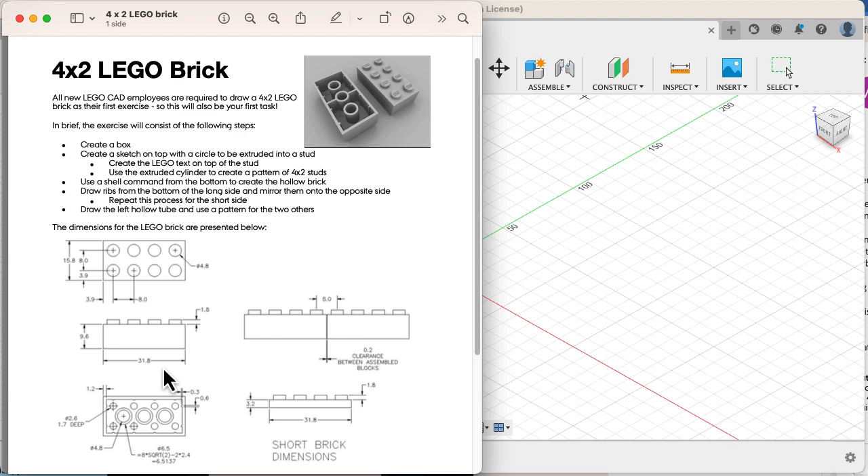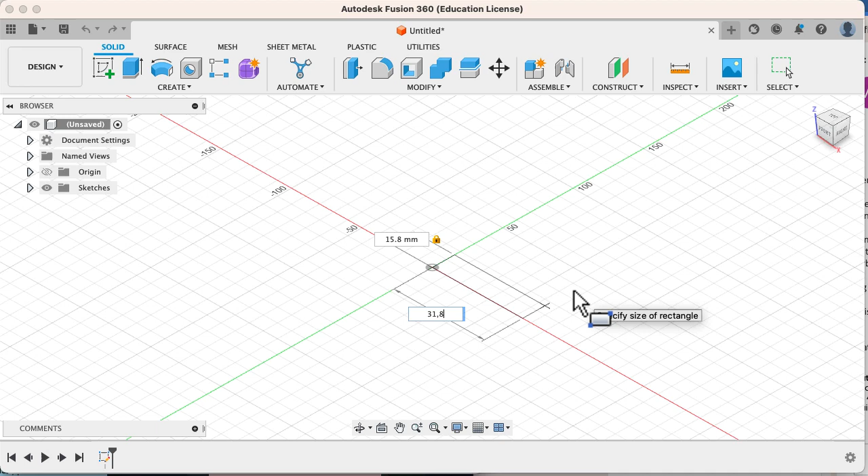First off, this one will be 15.8 by 31.8 millimeters and 9.6 millimeters in height. So we will go into Fusion, open a new document, and create a box. Again, we'll need to select the plane, and I'll use the XY plane. Just hit a corner, and then we have the dimensions: 15.8 by 31.8. Next we'll need the height, and the height again was 9.6. So now we've got the box, the rough outline of the Lego brick.

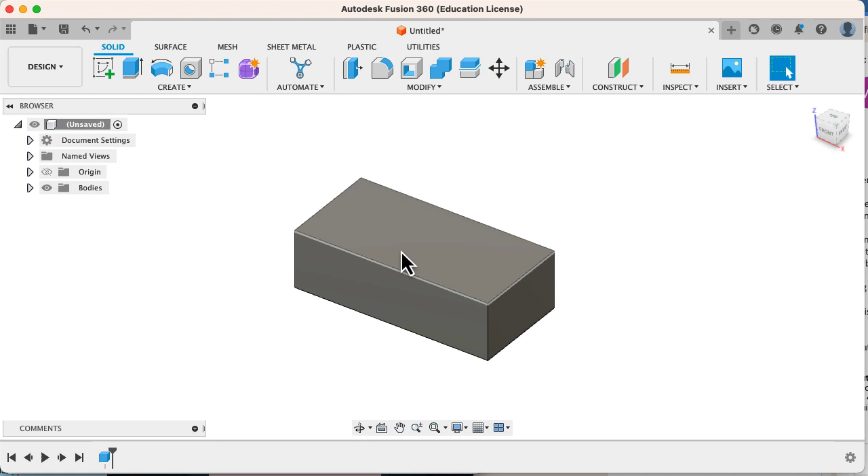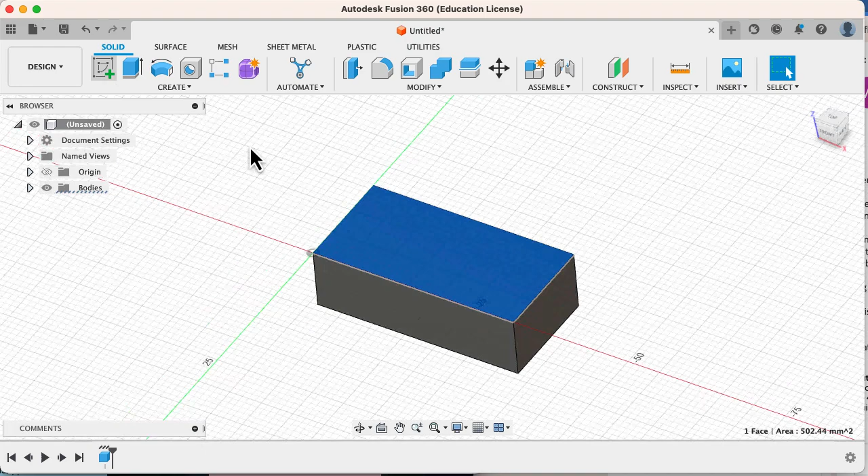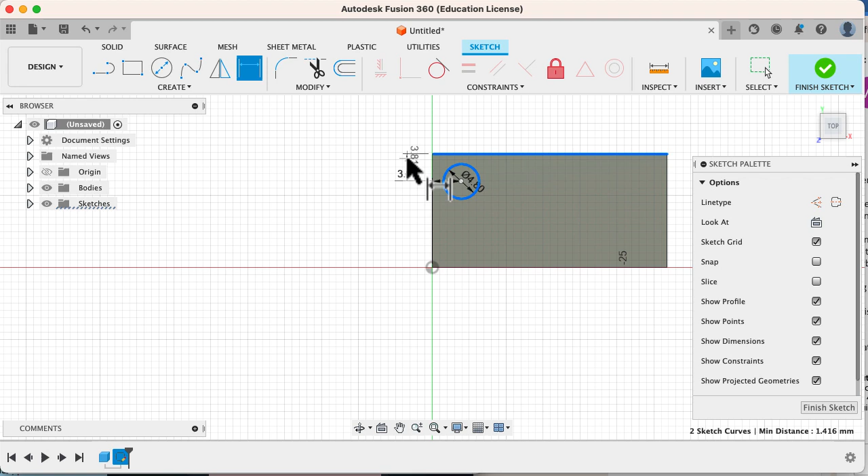Next off, we'll need to draw the stud on top. Here we have all the different studs, and one of them has a diameter of 4.8, and you'll notice that it's located 3.9 and 3.9 from that side and that side. So create a sketch on top of the brick, create a circle, and this one should be 4.8. Next, hit the dimension tool and say from here to the circle, it'll default to the center of the circle. This one should be 3.9. Likewise from the other side to the circle, this should also be 3.9. In this case, I will not enter the 3.9 because I can just hit the other dimension, and it'll be a calculated dimension stating that I'll need 3.9 both in that and that direction.

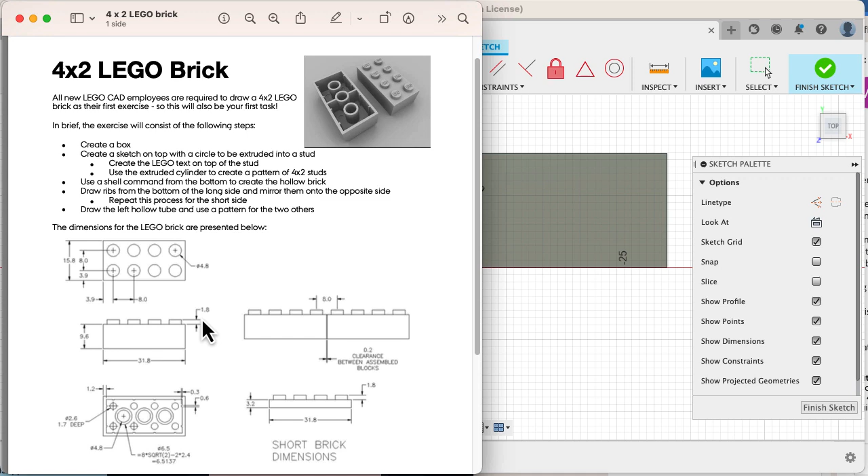So now I've got the stud drawn, and next we'll need to extrude it by 1.8 millimeters. So hit E for extrude, click the circular outline, and 1.8 millimeters in height. So now I've got one stud.

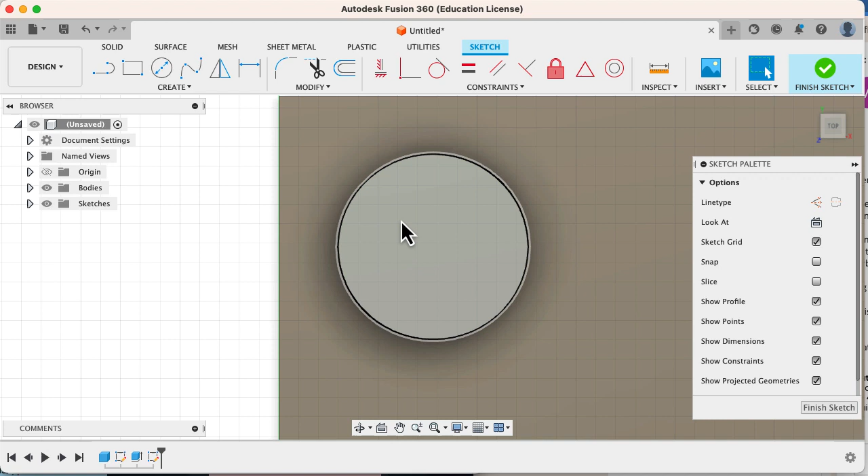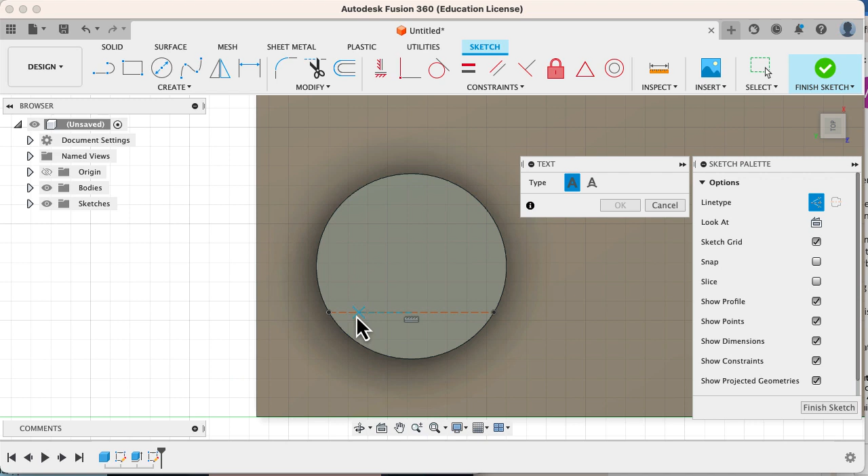Then we need the text, so hit sketch again, click on the top cylinder, and when we draw text, we will need the text tool. This one should be aligned to a line, so I will just rotate it so we get the right direction. Hit the line tool, and this should be a construction line. I'll go from one side of the circle to the other. I don't know which height yet, I'll select that in a moment. Then I'll choose the Create Text tool, hit the side of the line, and draw the corresponding box in which I can write text.

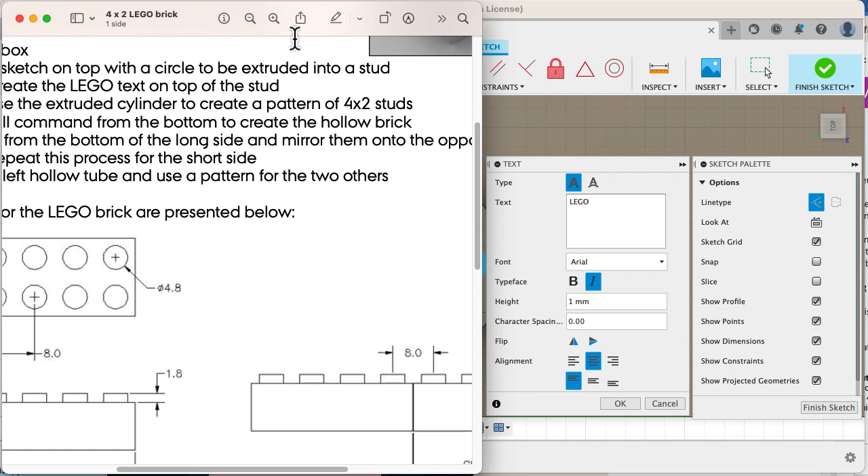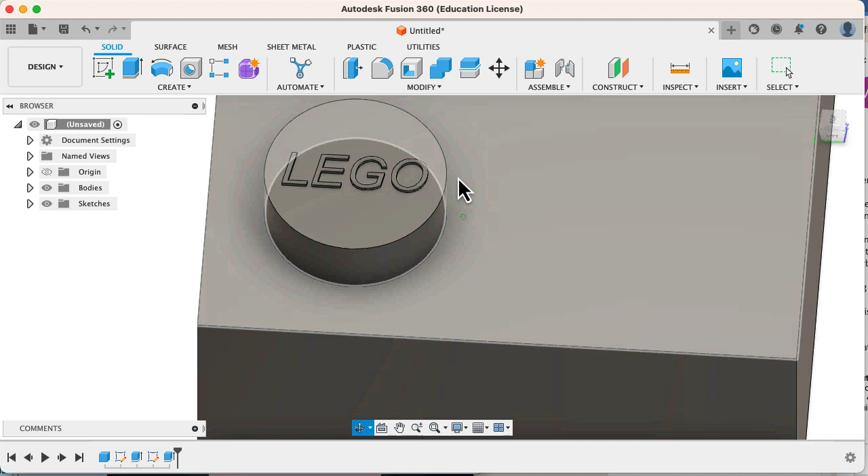So the text here should be Lego. As you might notice, this is very large, so hit the dimension tool and get it to be about 1 millimeter. I'll center it, not there, we'll put it to the left. It seems to be pretty centered, I think that's perfectly fine. We'll do the italic stuff, because if you really zoom into this one, you'll notice that's also what a Lego brick has. So I'm pretty satisfied, this looks about right. Hit OK, finish the sketch, and next hit extrude and select the Lego text, ensuring that it's blue, and I'll extrude this one for about 0.1 millimeters. So if I rotate, you notice that I've got the Lego text on a single stud.

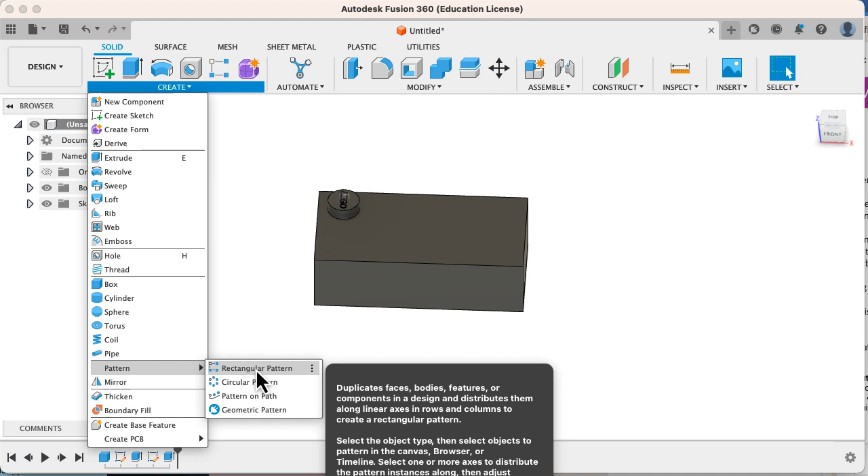So what about all the rest? Well, here we can use the pattern tool. There's either a rectangular pattern, a circular pattern, or pattern on a path, geometric patterns, whatever we like. But in this case, the rectangular pattern is actually what we like. So what should we be patterning? It defaults to bodies, but this is just a single body, so that would be the entire Lego brick. So in this case, we're actually going for the features. Which features? Well, we need the stud and we need the text.

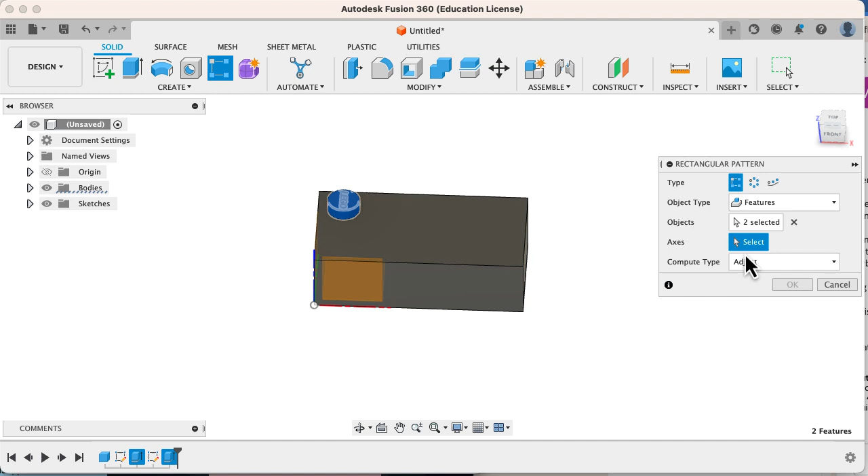So 2 features. Next, we'll need to hit the axis and just point to one of the sides and say that's one direction. How many? I need 4. And then you can actually just draw them out, and also the other direction, draw something out. It defaults to 3, that's not correct, it should be 2.

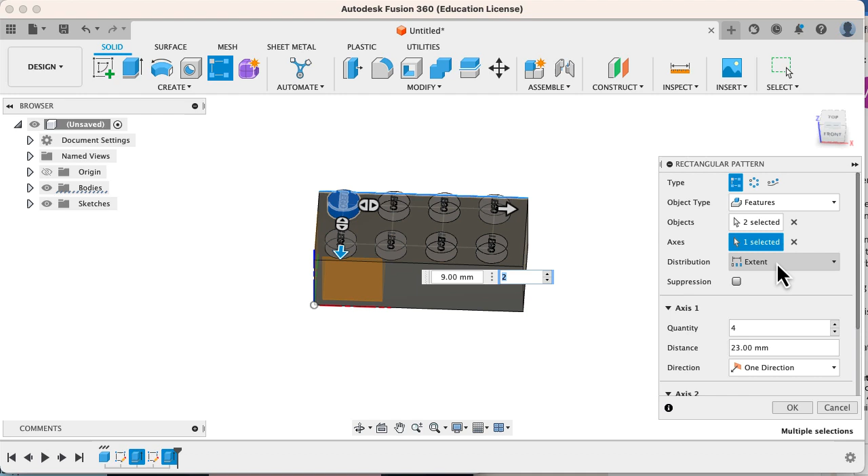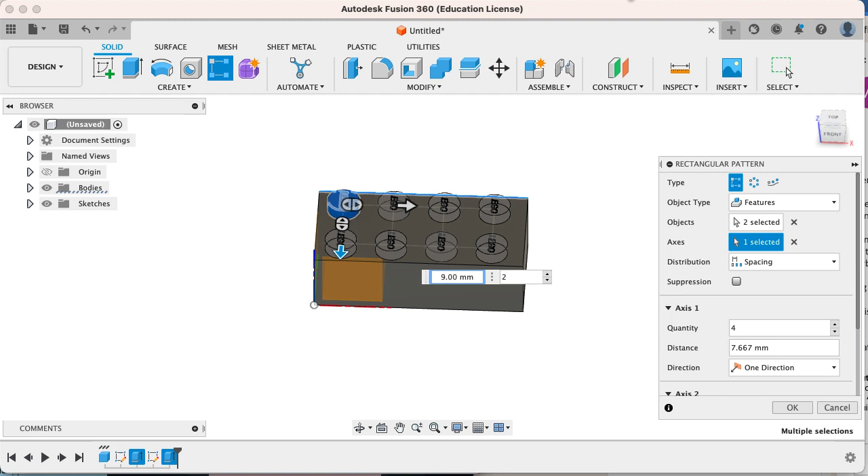It defaults to an extent in both dimensions, but that's actually not what I'd like. I want a spacing, because that's what's specified in my drawing. Notice here we've got 8 millimeters in both directions, so that's what we need to specify when we choose the spacing: 8 millimeters one way, 8 millimeters the other. So 4 spaced 8 millimeters apart, 2 spaced 8 millimeters apart, and hit OK.

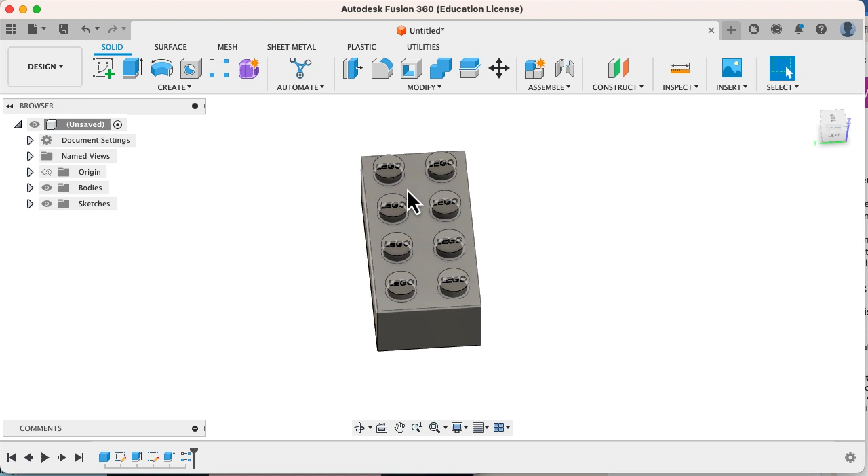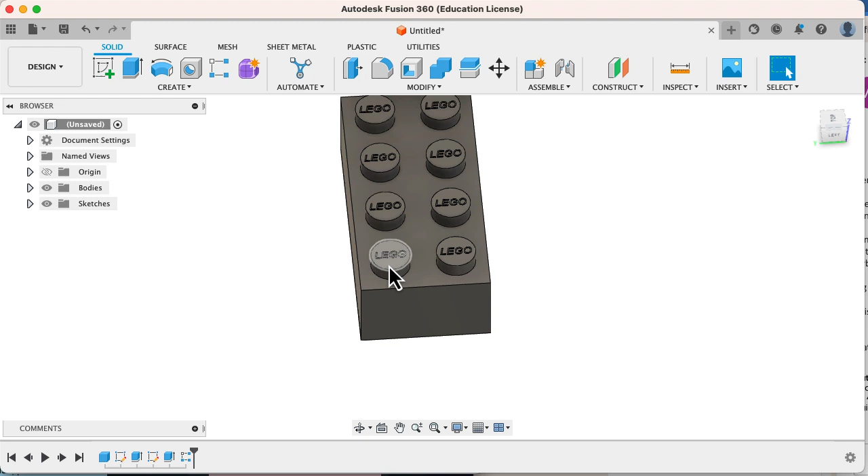And now we've got all of the studs present. The reason this is a good idea is that if you change something, let's say the extrusion or the font was incorrect, and you change the original single stud, all the other studs will also change in the same manner. So instead of drawing 8 separate studs, this is a vastly improved version of the same job.

But this is a whole brick. This won't work if we want to build anything — we need to hollow it out. So next we'll hit the shell button, and you just need to select the surface to remove, in this case the bottom. And we'll need to check the dimensions.

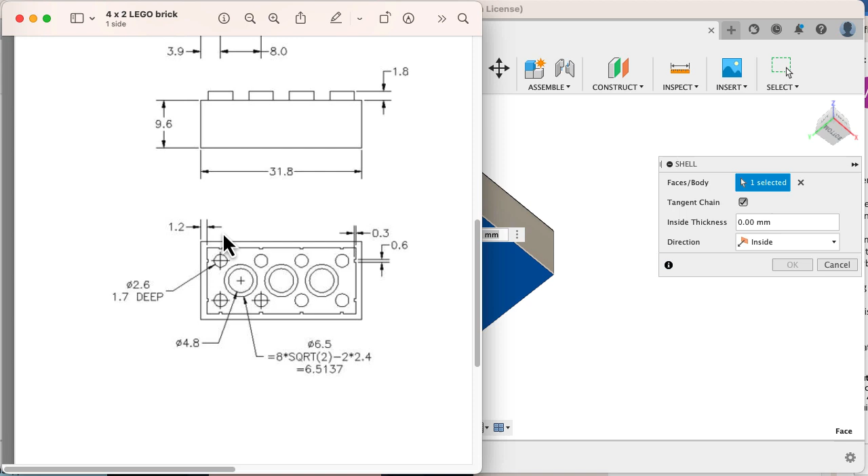So it's 1.2 millimeters in thickness. So 1.2 — and you can notice it eats everything, including up into the different studs. That's perfect, that's exactly what I wanted. So now we have the shell.

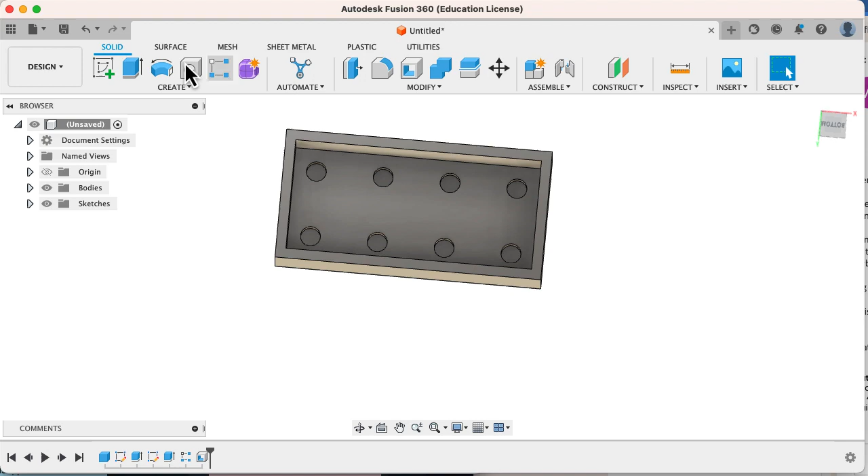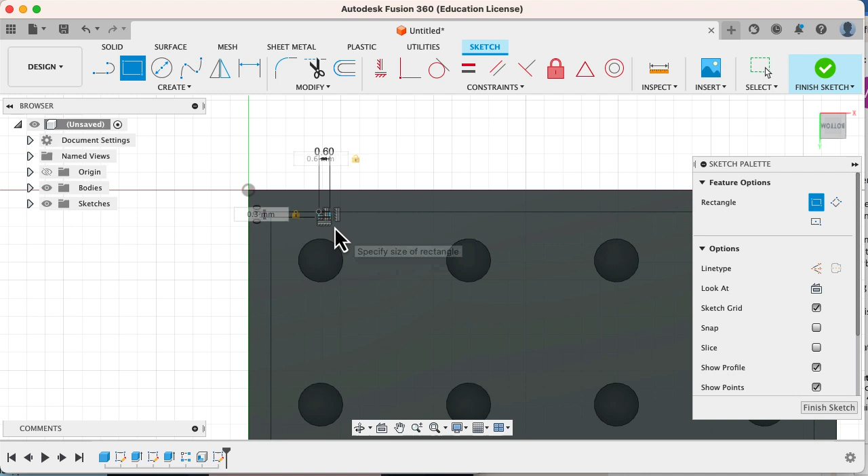Next up, we need the slits on either side. If you go into this one and look at the dimensions, you'll notice these are 0.6 wide and 0.3 high. In this case, I'll sketch from the bottom of my brick. I'll hit this surface, hit the rectangle, and just draw a rectangle here. The dimensions were 0.6 by 0.3 — so 0.3, 0.6. That's the little bitty thing I wanted.

Next up, we need to place it correctly. As you might notice, it has to be placed right next to the stud, because its function is actually to connect to the studs on top. So we'll need to align it.

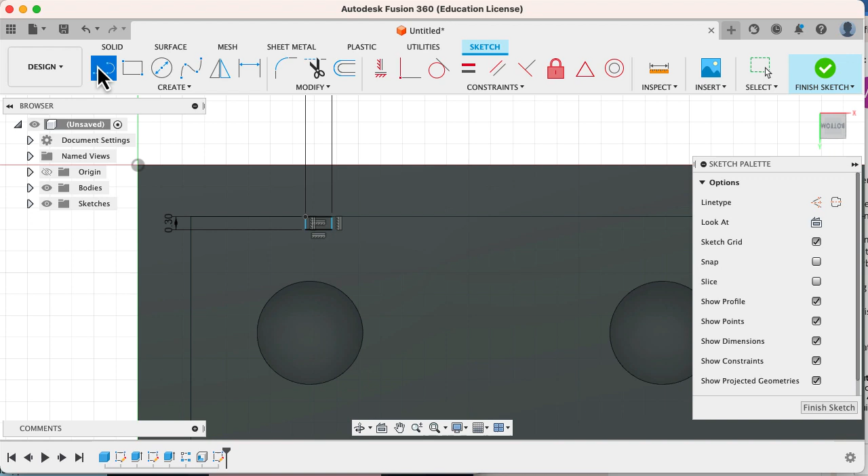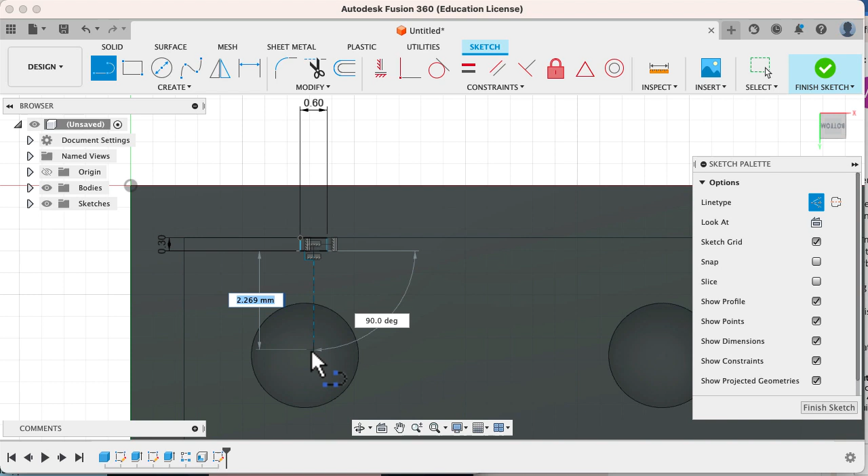The easiest way to do this is to use a helping line. Hit the line tool, hit construction, and draw a line from the center of the small rectangle to the center of the circle. As you might notice, I can't catch that — that's because I haven't got access to this line, it's not in the same plane. I'll hit escape, and if you rotate around, you can see what I'm talking about: we're drawing up here, but this one's not right there.

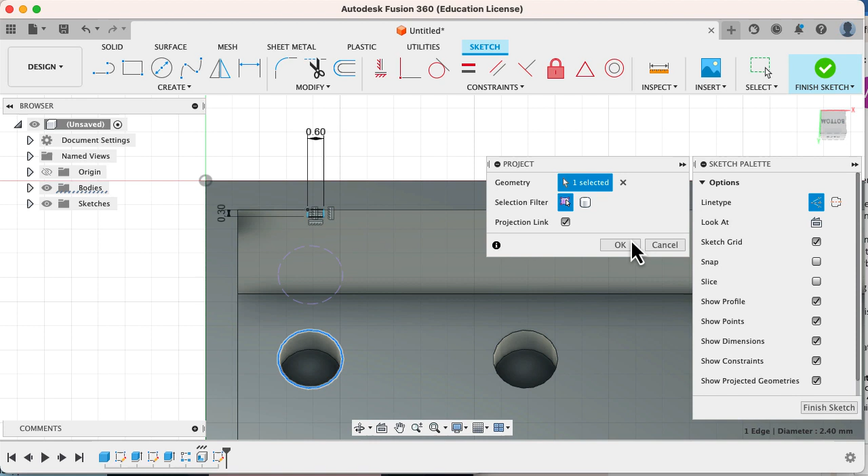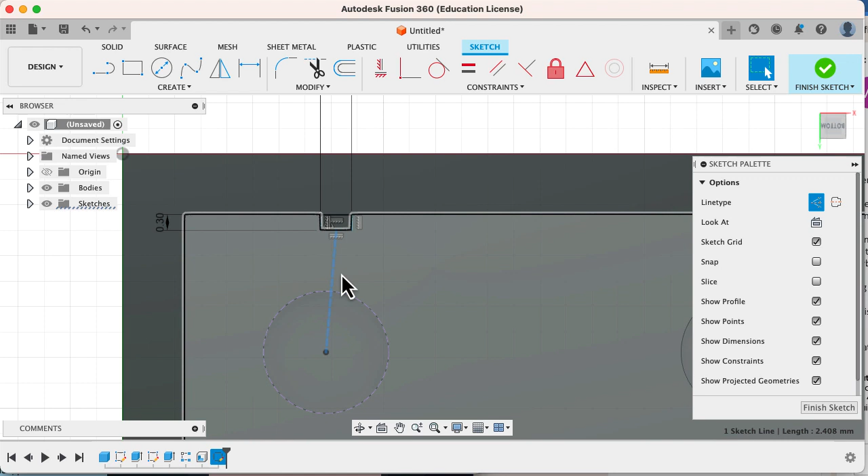So in order to gain access to that one, we need to project it into the sketch plane. Hit P for project, hit the geometry I want, and you'll notice the construction geometry gets projected into my work plane. Now I can actually do what I wanted — draw a line from the center of my small rectangle to the center of this circle. It's still not correctly placed, because this one isn't vertical. But if I hit the line, hit vertical, it'll move into place. Now I know this one's placed right outside the stud I needed it to be in.

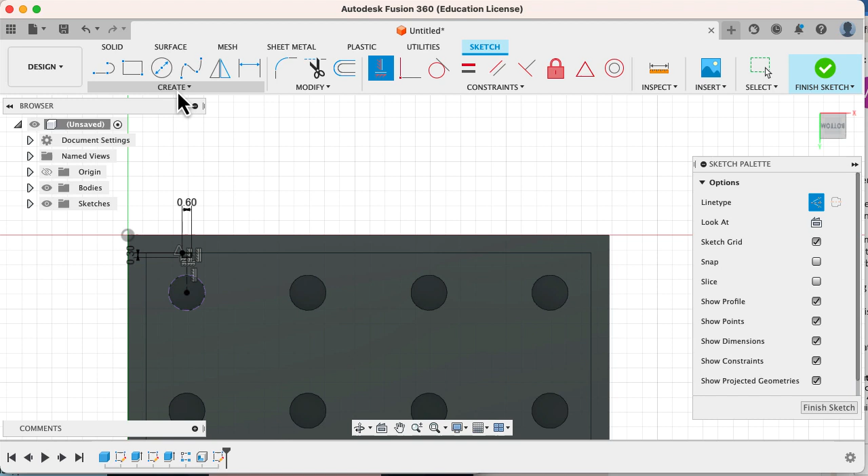So we are done — now we just need the pattern. I can either do the pattern inside here, but I prefer not to. There is a rectangular pattern option in here, but the reason I don't like doing it this way is there are a lot of symbols and they get even worse when you do it in here. So I'll actually extrude this one in the 3D and then do a pattern on the extruded feature. Okay, so again, hit E, hit this small section.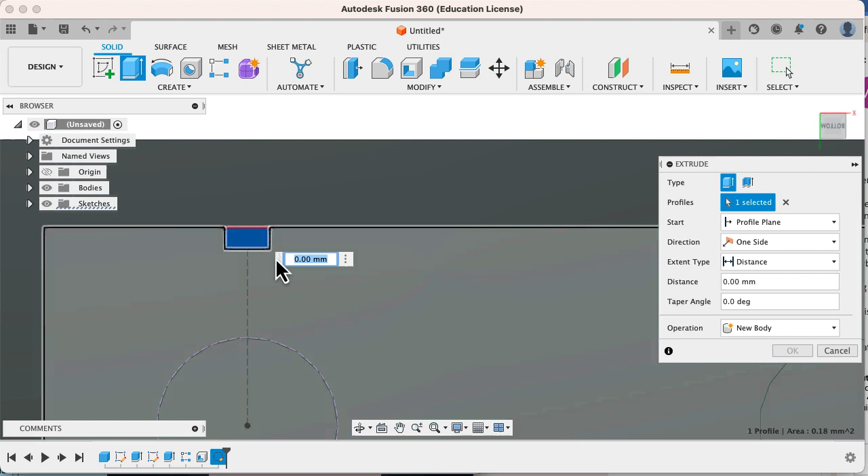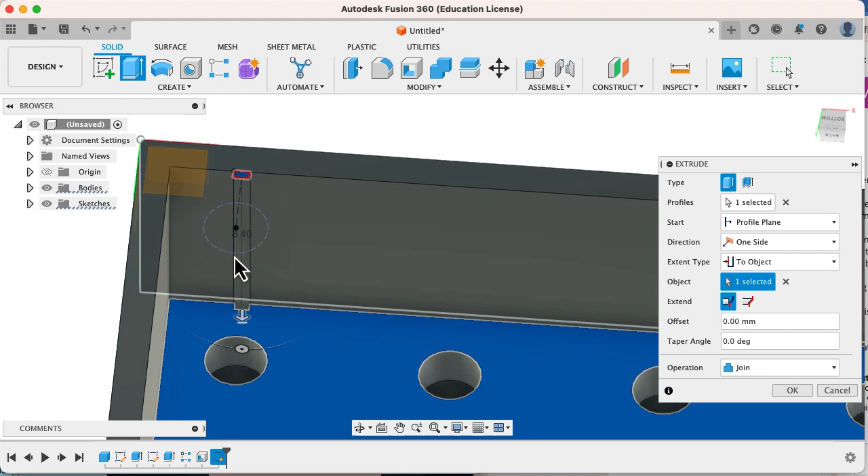Until now, we've always extruded to a known distance. In this case, I'd like to extrude to this surface, because that's the height I want it to go to. I don't know how high it is — I could find out, but it's not necessary, because I just tell it to go to that surface, and it will extrude to that specific surface. So now we've got one of them.

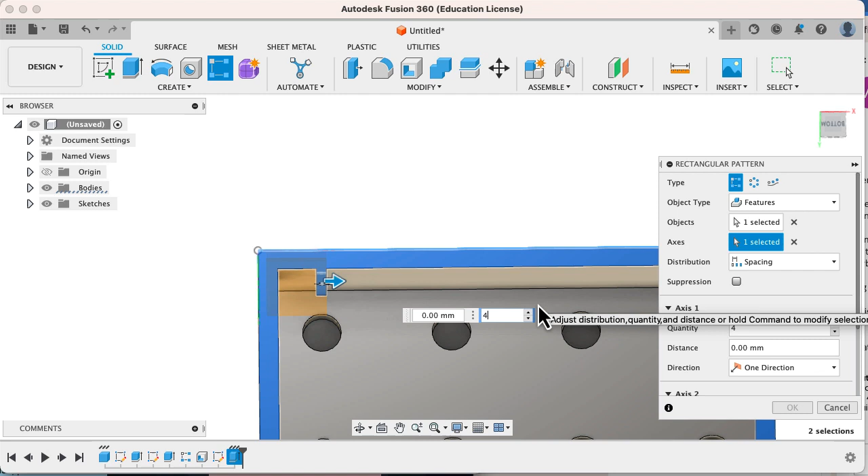Next up, again we'll hit the pattern tool, the rectangular pattern. It's set to features, so I'll just hit this feature. Next we'll select the axes, and again this will be that way. We'll need 4, spaced 8 millimeters apart. So, we've got all of them. Okay.

But what about the other side? I could have done a rectangular pattern like before, spaced so and so in the other direction, but I'd like to introduce a command called mirror.

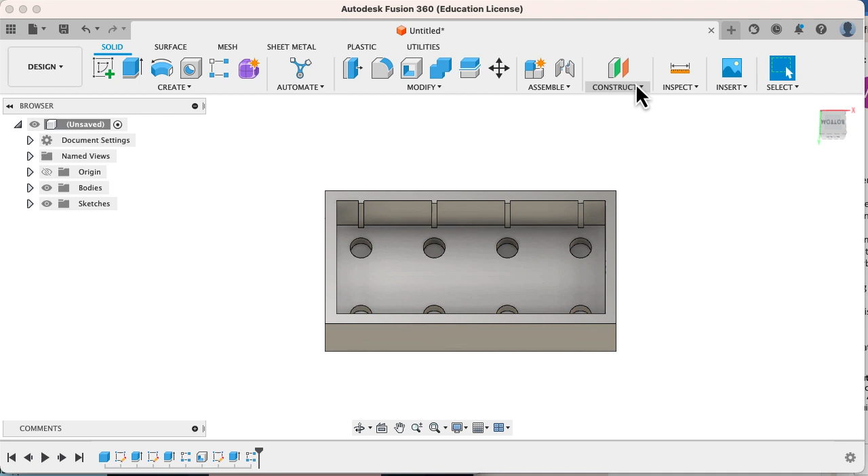First off, we need a central plane. It probably would have been better if I drew this Lego brick with the origo in the center, but you might remember the origo is placed in the corner, so we can't do that. Fortunately, we can create helping geometry, namely a midplane. If you expand the construct button, you can see different ways of drawing a plane, including the midplane. So you hit one side and the other side, and now I have a plane specified in the center.

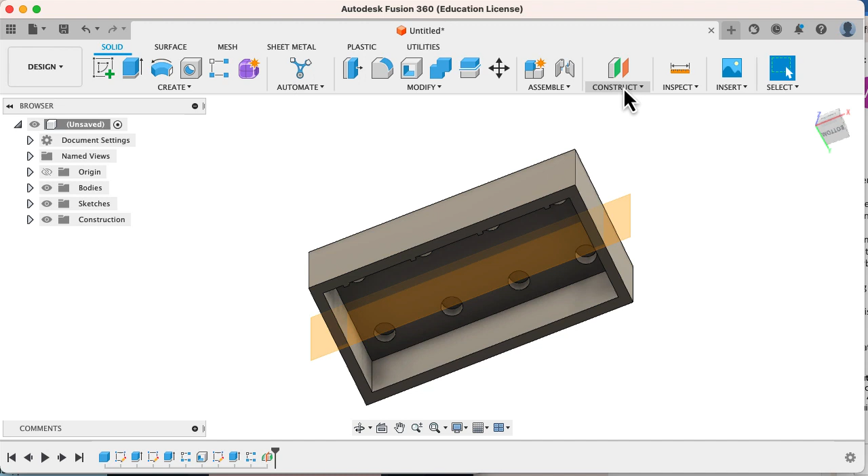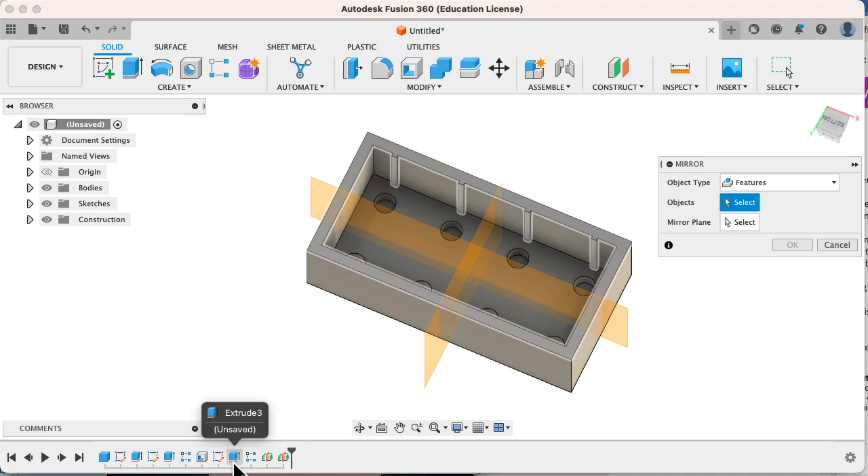I can help myself here, since we also need to draw rectangles on the side. Once more, create a midplane between this side and this side, and now I've got the two planes I need. So now we can mirror these four things to the other side. Create mirror. It defaults to bodies, but we need features, and I'd like the initial extrusion and the pattern. I want a mirror plane, which is this one, and now I've got the rectangles on both sides.

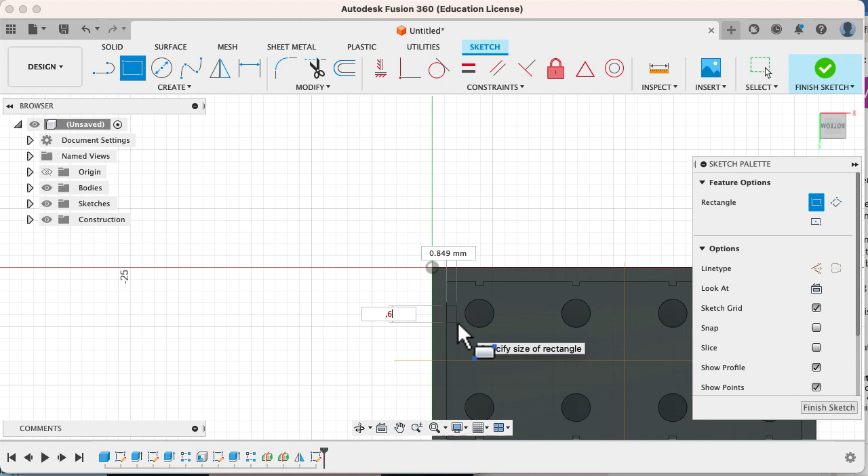So rinse and repeat. Now we need the short sides. I'll hit this surface, sketch, and do a rectangle which should be 0.6 by 0.3.

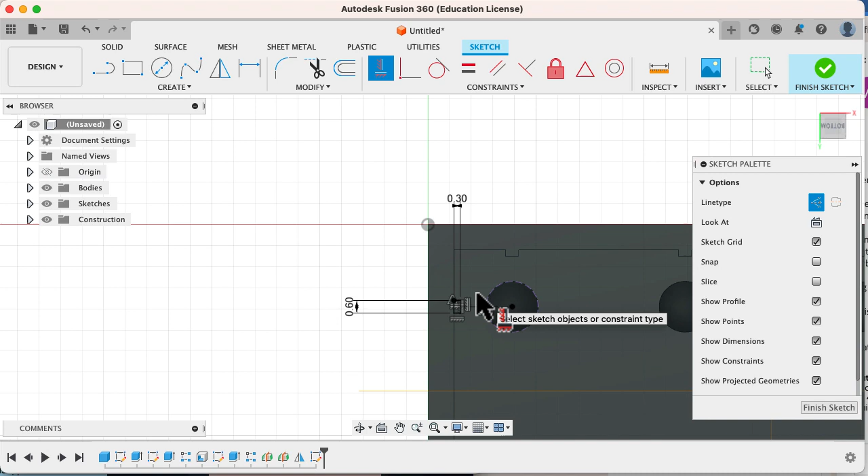And again we'll need to project the circle using construction geometry. Hit a line from the center of the rectangle to the center of the circle, and ensure this one is horizontal. So now it's placed correctly. I'll hit finish.

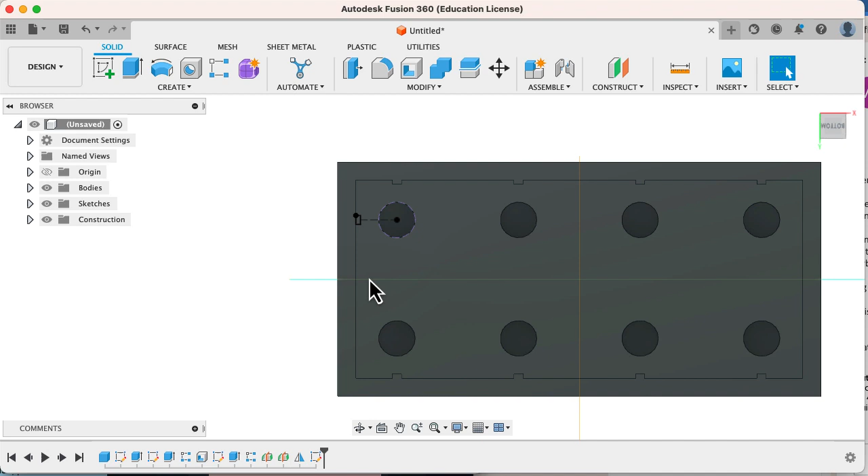Two options now. I could do a pattern, then I'd need to specify the distance, but you might notice this one is actually perfectly symmetrical, so I could just use a mirror. I'll use that one. Create mirror - oh sorry, I forgot to extrude. Just extrude the rectangle, again not using a distance but to the bottom, and hit OK.

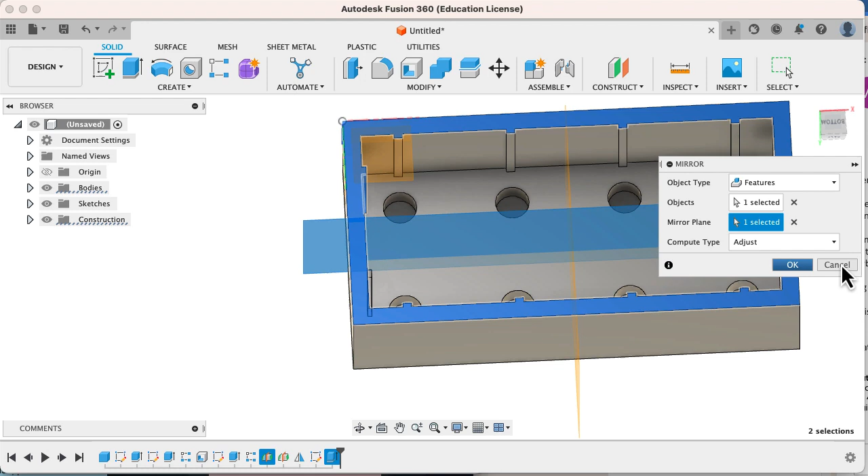Then do the create mirror using the just extruded feature and the same mirror plane. So now it comes over here. And now we just need it on the opposite side, but that's why we did the second plane.

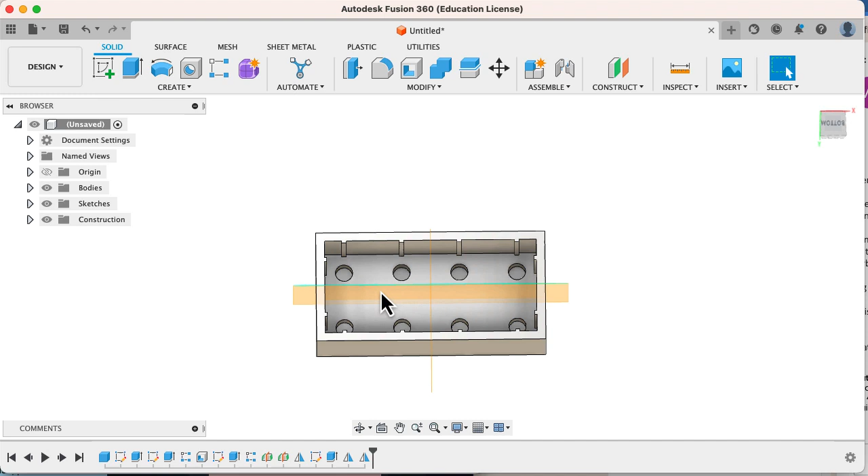Again, create mirror, hit the initial extrusion and the mirror plane, and the two rectangles appear on the opposite side. So we are almost finished. Next up, we'll need the circles in the bottom. I'll just hide the construction geometry by hitting the I key.

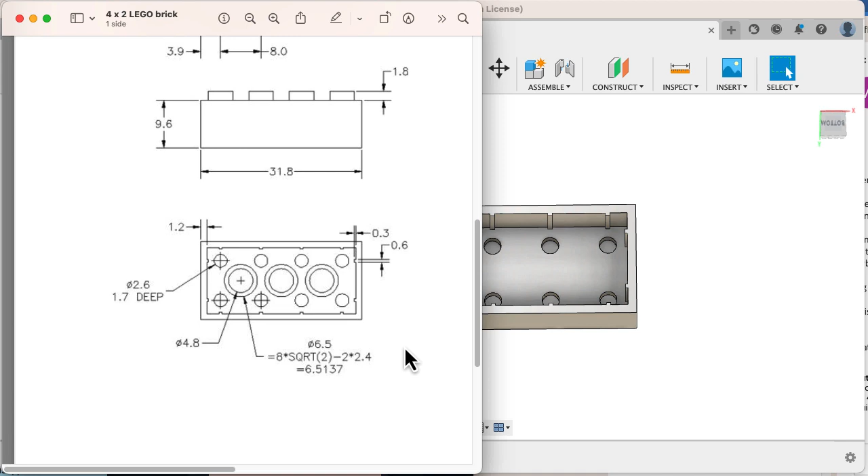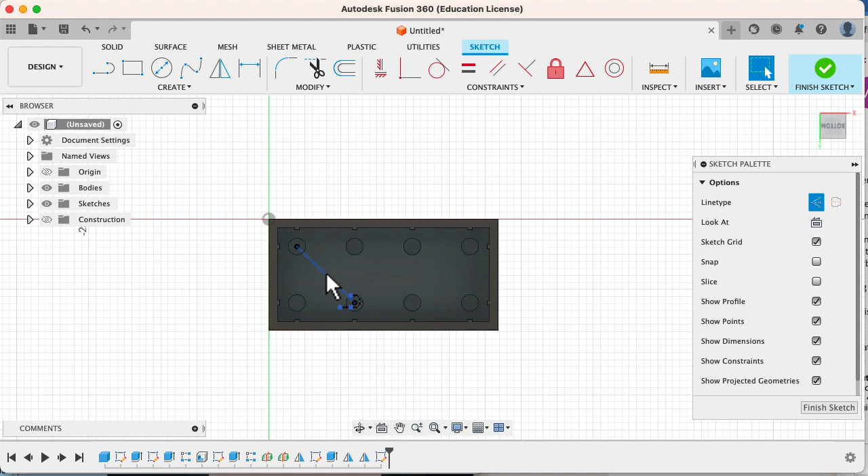So let's draw this. We'll hit the bottom here and sketch it. We need a circle right in the center. How to do that? We could hit the line tool, create construction geometry going from this circle to this circle, because then we'll actually have a center to draw a circle on. Hit the circle button, and this should be regular geometry, so I'll switch off the construction. Again, if I hit the center of the line, a small triangle will appear saying you are drawing at the very center of this line.

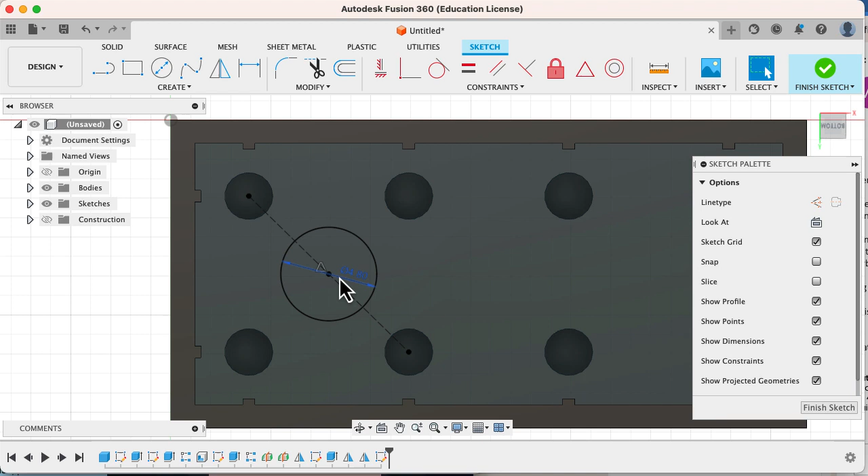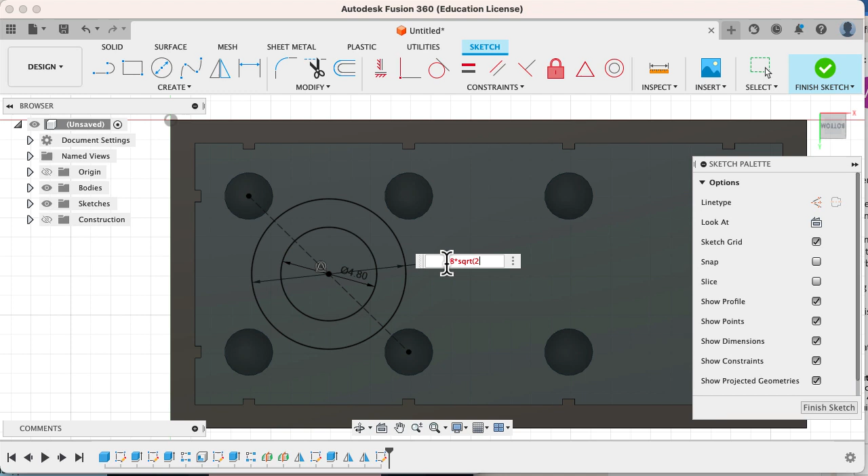First off, I needed a circle of 4.8. Next, I needed another circle, so hitting C, that should be another distance. This one is 8 times the square root of 2, minus 2 times 2.4. So dimension, hit this one, and say 8 times the square root of 2 minus 2 times 2.4. Hit enter, and it calculates the equation saying 6.514.

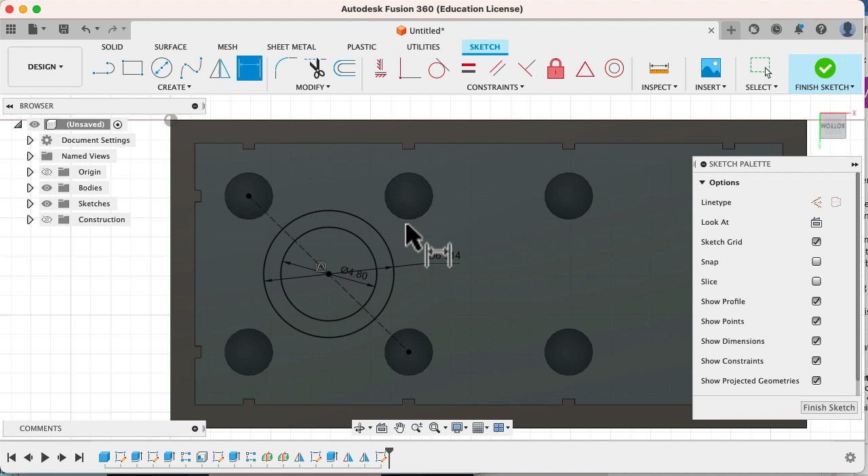Good to go. Hit finish, and again I'll need to extrude what's between the two circles. That's easy, I'll just click it. Once more I will not be entering the distance - I want to extrude this one to the top. Hit OK. So now I've got one circle, and again I can do a pattern.

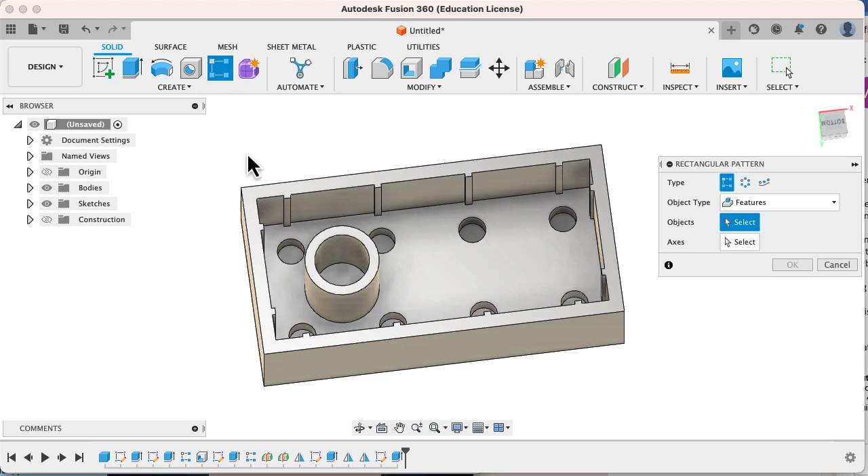So hit the rectangular pattern, it's set to feature, click the feature, click the way to draw it, go in this direction, and we'll need 3 - that's actually correct - and once more 8 millimeters apart. That should be good.

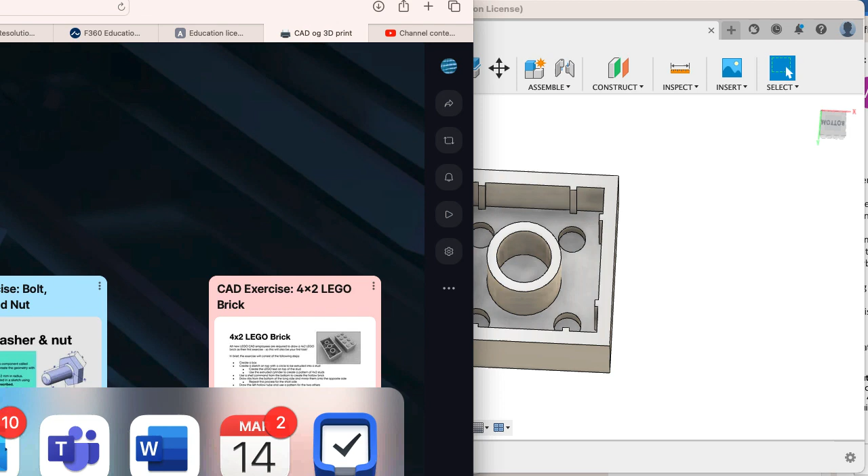So finally, and the instructions diverge a little bit on this point, I think this is actually a perfectly fine Lego brick, but if you notice the instructions, we have this little middle part here. Let's just assume this one needs to be drawn. I don't actually know the dimensions because they're not present, but let's assume this is something we need to create.

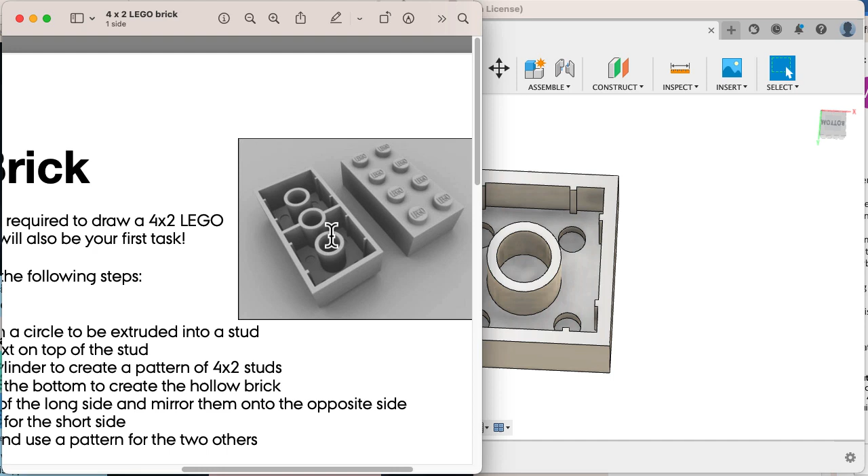And I think it's about the same dimension as the small ribs, so we'll do one 0.6 millimeters wide directly in the center. So, sketch on top of my brick, and now I would like a rectangle in the very center.

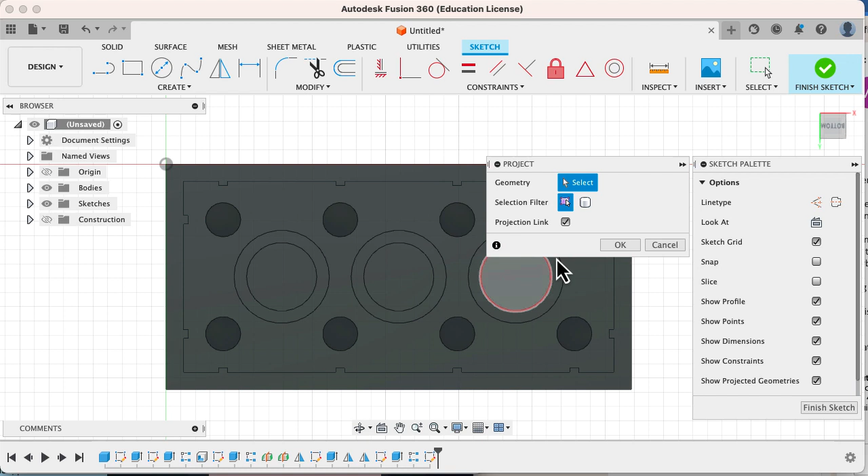I'll hit P for project, construction geometry, and get the center circle, so now I know where the exact center of my model is placed. I go back to regular geometry, then I'll create a rectangle, but in the rectangle part I can choose a center rectangle. If I hit this one, I can go out and hit the side.

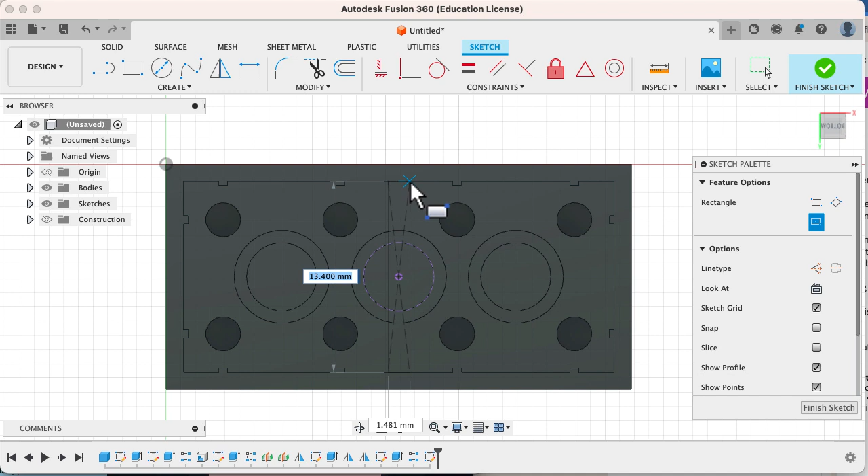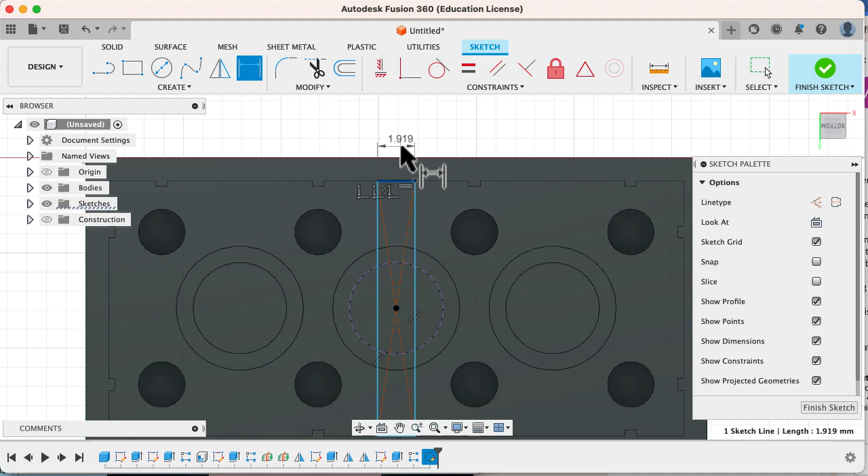So here a number of constraints are imposed. You can see the orthogonality, we can see this is horizontal, and it's set to be on this line. I can't move it away, so that's perfectly fine. Now I just need a D for dimension and say this little distance should be 0.6. I'm guessing, but let's say that's correct.

So I'm actually done, I'll hit finish sketch because... oh, I made a mistake. I'm sorry, I forgot to project the outer circle. We need to do that.

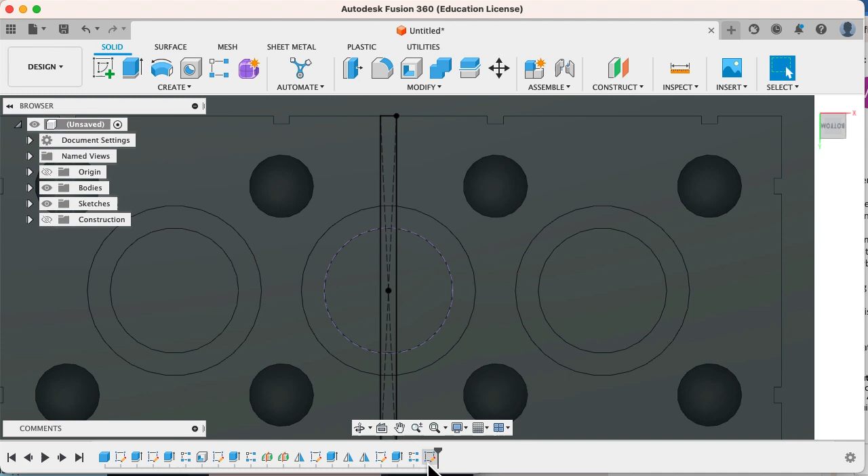Edit the sketch, hit P for project, and hit the outer circle. And this one should not be construction, that's actually what we require, because the only thing I want to extrude is this part and this part. So whenever lines intersect in Fusion, they actually divide the geometry.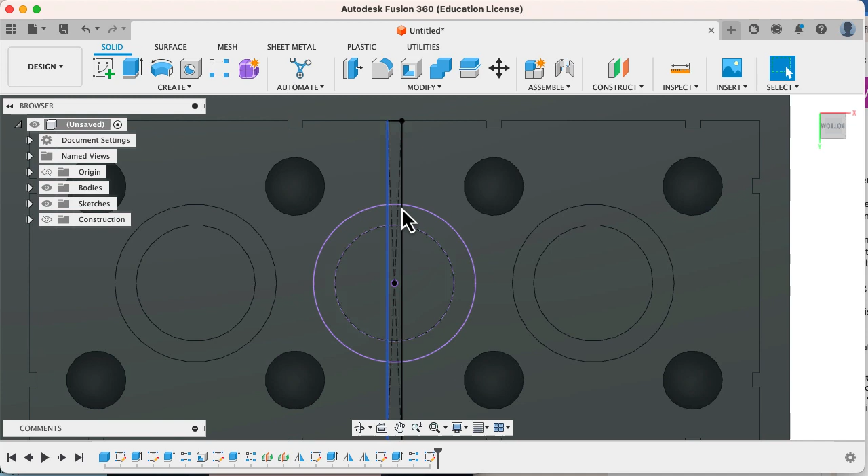So my final extrusion will just be an E, and this part, and do it to the bottom of my Lego brick, and now I actually have that central rib that's depicted in the image.

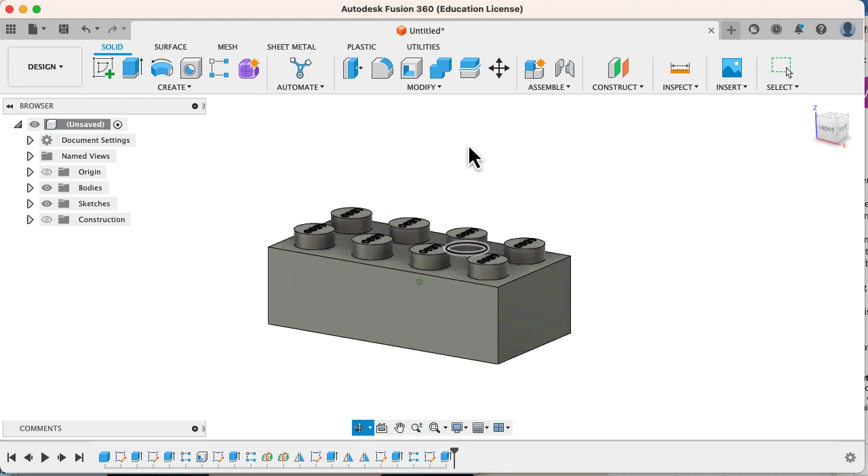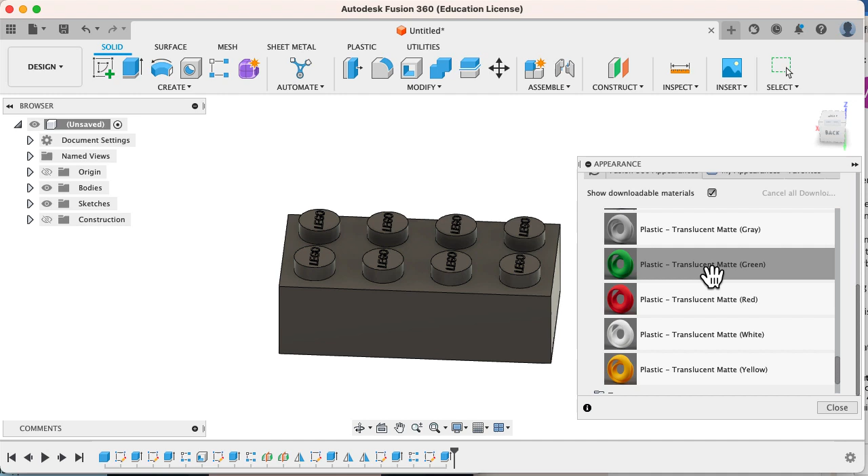One of the fun parts of Fusion is you can change the appearance. You can do it red, white, gray, whatever you like, if you just hit A. In A, you have a library of different materials you can impose upon this one. One of them is named plastic. If you go into that one, there are some translucent plastics, including a very nice red. I'll just drag it over my Lego brick and it turns red.

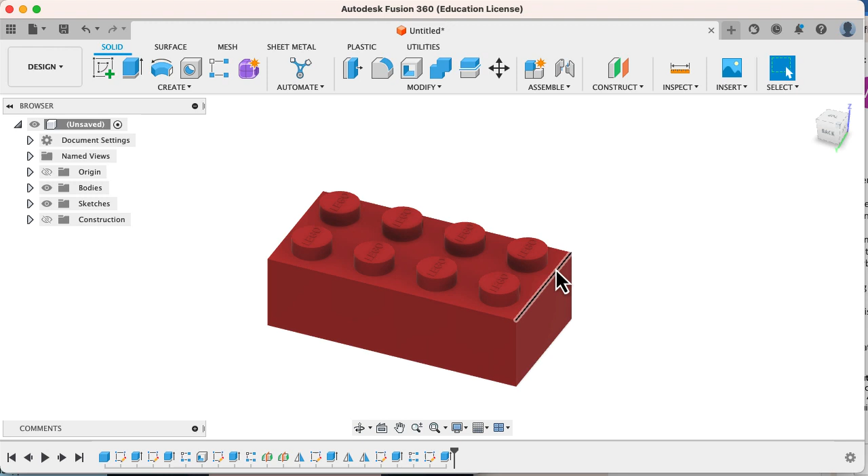You might not be that impressed. I mean, okay, it looks nice, but it maybe could look nicer. One option is going to the display section and say visual style. It defaults to shaded with visible edges, that's why there are these black outlines. If I just say shaded, then I get a more realistic view, now these black outlines are hidden. I'll just set it back.

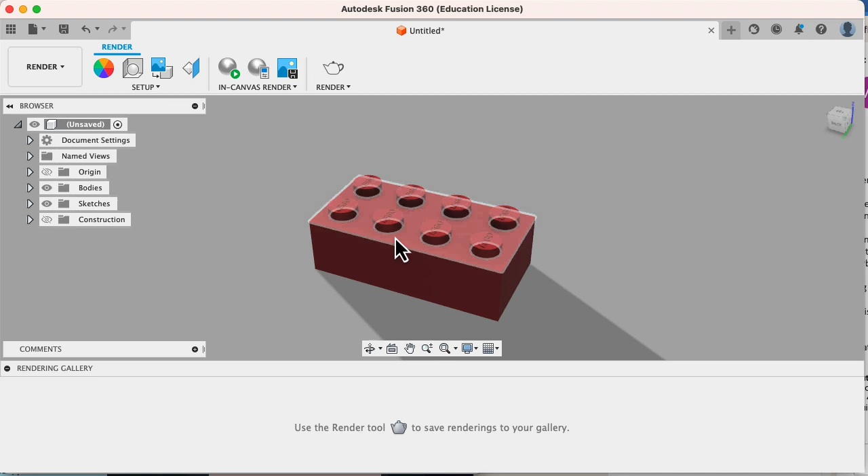But you can actually also do ray tracing inside Fusion. So if you want a finer depiction of your project, you can go up onto the design button and do a render. So now we're in the ray tracing mode. You can actually specify the scene settings, what's the background, where are the lights, and all that. And you can do an in-canvas render, that's basically this one, and this will carry on for a number of iterations until I get a good result.

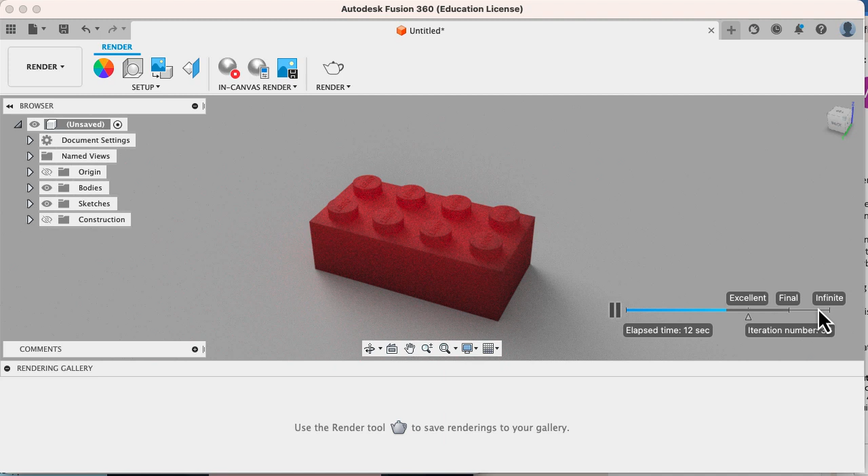By the time it hits this one, it says it should be excellent, then it's final, and it can create an infinity loop. So basically, if I change my geometry here, it'll do the ray tracing all over again. I can also do a capture of the image, and I can also specify how I wanted my render to be set up.

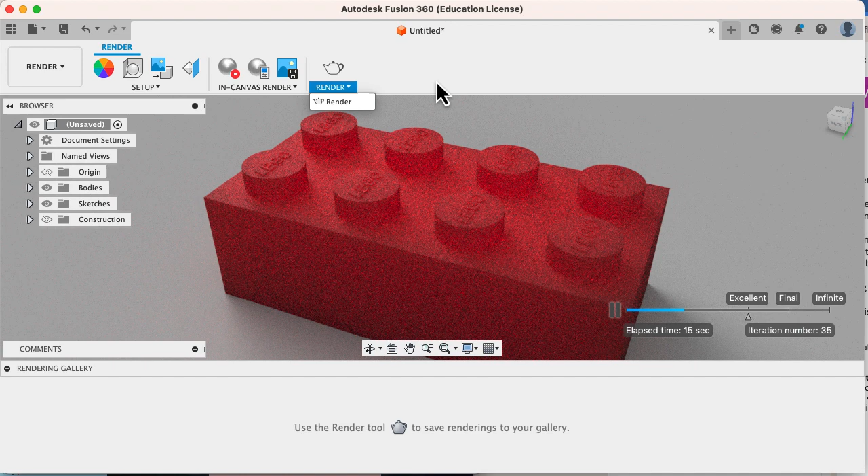And actually also, if you have the education license, which I recommend, you can do this render in the cloud. That's one of the things that you gain with that one.

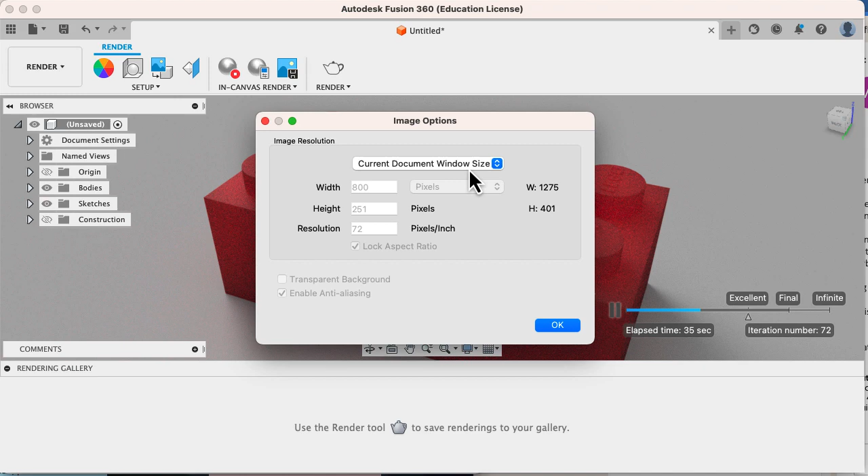So let's try a final result. I'll hit the image button and say, well, actually I want a current window size, or I can specify it. Hit OK. Then I need to save my geometry. This was a Lego brick 4x2.

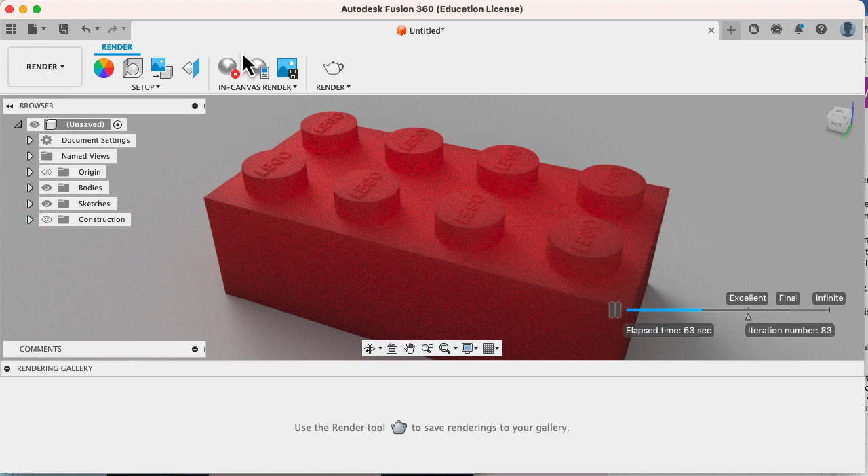And I'll save it to the medical design. Oh yeah, I need to save the design, sorry, go back to the design, save it. Lego brick 4x2.

Go into the render, set it up, that's fine, and hit the render. So here you can default to whatever image size you'd like.

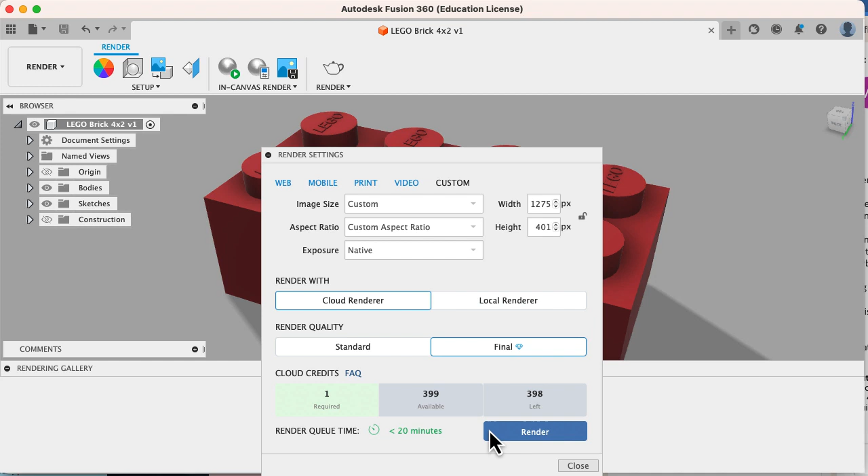You can do the cloud rendering, and this requires some cloud credits. You've got a lot of credits because it's an education version, and just hit render and it'll render in some time, but it doesn't take up computer power on your computer. You're free to leave this one, this has been uploaded to the cloud. It'll just crunch the design in the cloud, leaving you free to do other stuff.

So that concludes the Lego exercise. Thanks for watching.